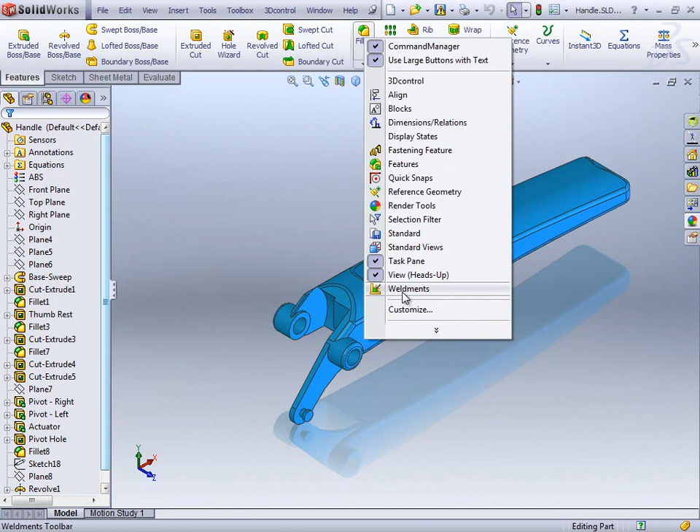So if you look, we've got our little part, and there's a little split tool that we have to use. If I right click on customize, you go into commands and features, you'll see our little split tool is there. So commands, features, split tool, and you can drag that up onto your toolbar for handiness. Do that in class as well. If you're watching this at home and you come into class, do it in class, because like I say, this is coming up in the test.

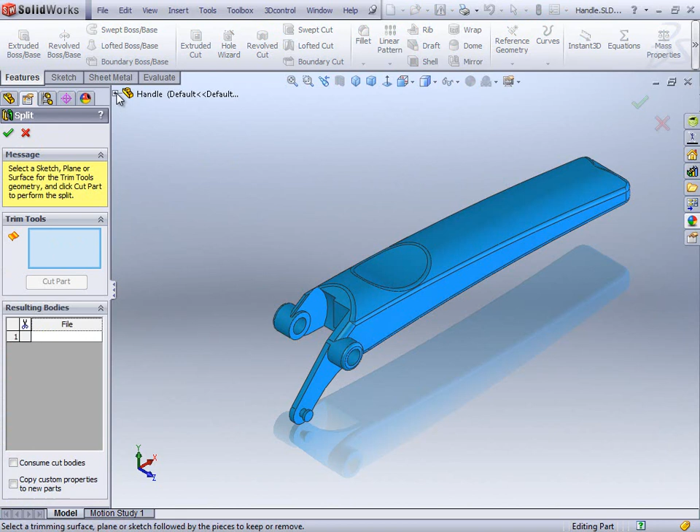So I click on that and select the split feature. You can see here we've got trim tools, trimming surfaces. So what this really means is where you want to slice this thing down. If we look here at our front plane, we're going to slice this one right down the middle there. Okay, so we'll have a look at slicing this down. And you can go ahead and actually cut the part now. So we'll cut it using that plane.

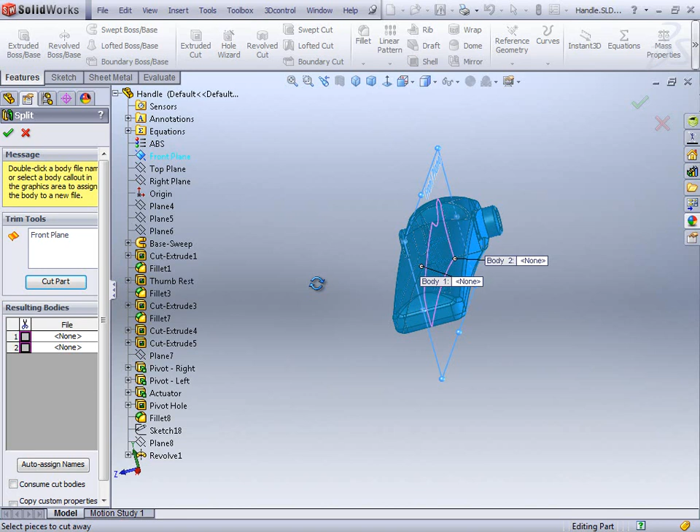And you can see down here the resultant bodies has changed to 2 because we've now got 2 solid bodies in this whole thing. Okay, when we click out of it, again we've got this label a little bit easier in this one to kind of see which one is which. So body 2 is obviously one on the right hand side and body 1's the left hand side.

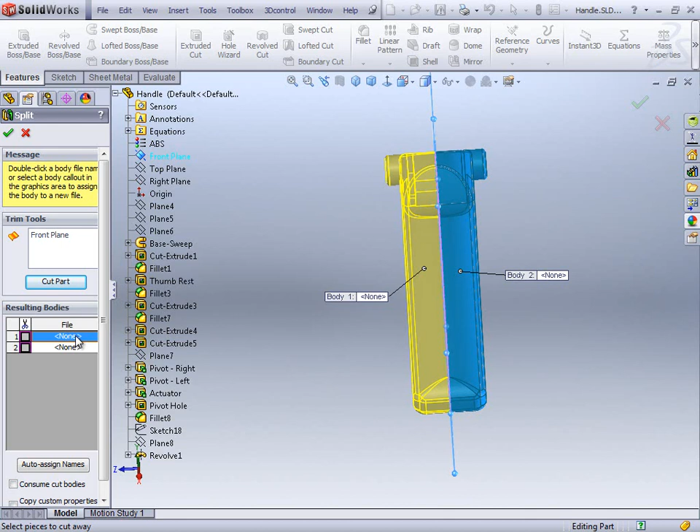So again, same as before, if I double click on that, click on a part, and in the desktop I'm going to save this one as this left hand, wasn't it? Hope we get the right side. Left hand, I'll call it the same as the book. So handle left side. I'll stick to the same name as the book. So click on save on that.

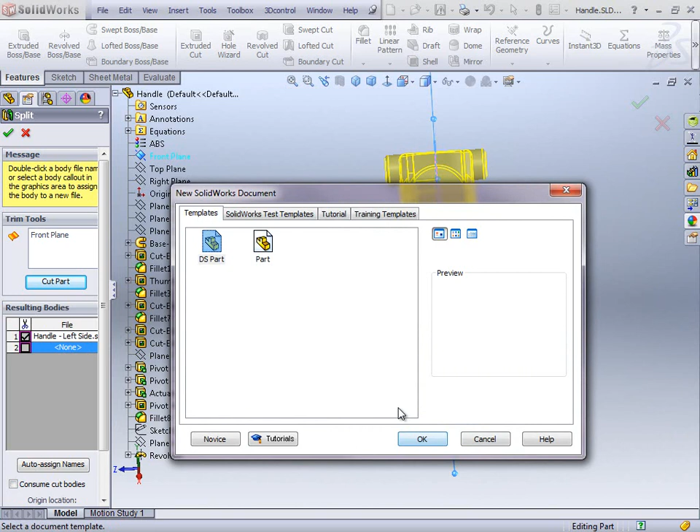And do the same now on this one. So this one, again, it's a part, and we're going to call this one handle right. Handle right side, and click save on that. So we've got the handle right side and handle left side. Okay, so I click OK to that.

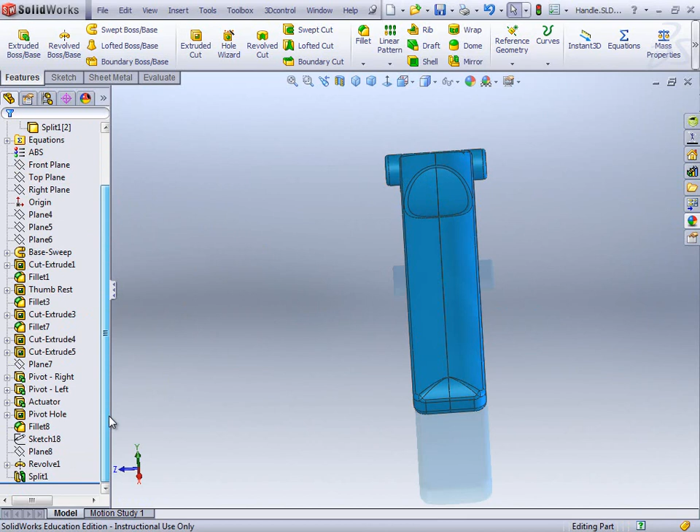It goes, it does its business, saving, it will convert the files to the current version because this is an old file, that's why I'm getting this, and we've got a newer version. So yeah, I'll go ahead and save that, and we'll go ahead and save the other one as well. Okay, so now we've got 2 solid bodies, because it's split down the middle and we've got 2 solid bodies as well. And you can see my little split tool.

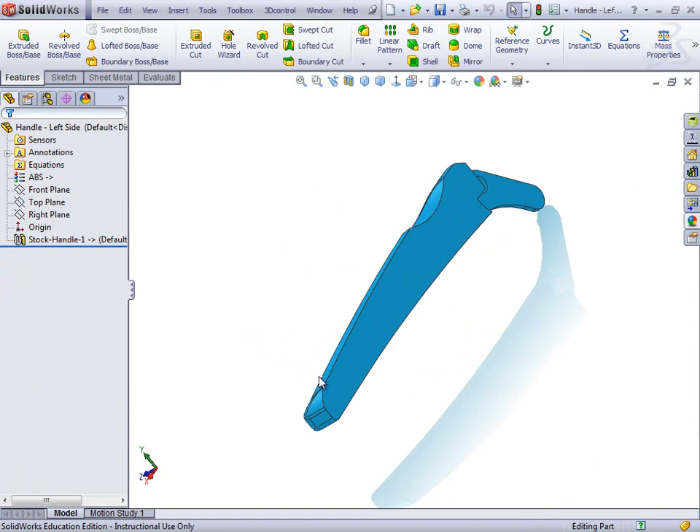Okay, and if I go out then I got a right hand part and left hand. Wrong way round, that's the right hand part. The other one was the left hand part. There we go. So we got both parts as separate files, and you could go and do whatever else work was needed in that. If I go back into my handle,

Just one thing to kind of finish off on that you're going to have to do in the test as well is just finish this one off and combine them back again. So although they're kind of separated, we're going to combine them back again, and just click on the add and select these 2 objects and click OK, and just combine them back to their original state, just to get rid of that split line and to get rid of the 2 solid bodies thing.

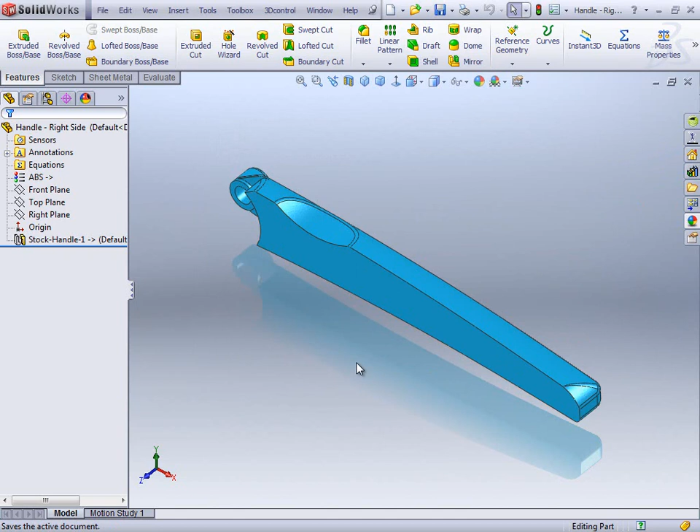You can see, update that and update that, and you see that one. I save all. That one's fine. Everything's kind of still the same there, and we're still kind of happy days with that. Okay, so we've got those kind of created.

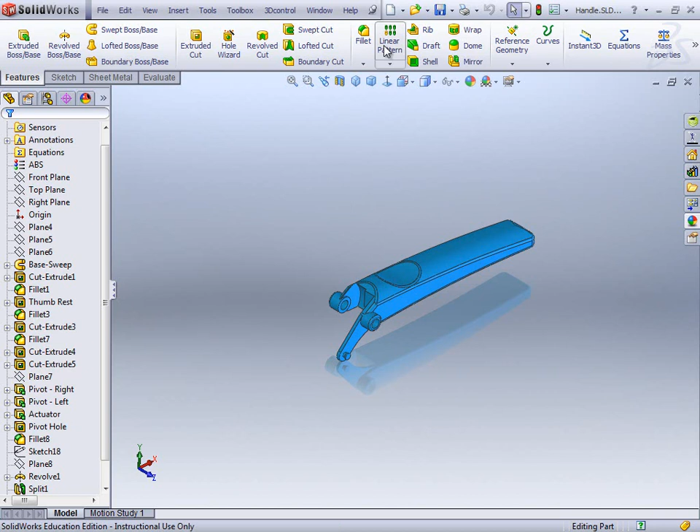Lastly then, the book just gets you to create a little assembly from that. So if I make an assembly from a part, so just do a standard assembly, and from the left and the right side, and if I do take my left hand first, say, and click on the OK, and then insert components, and then the right hand side, and then click on OK.

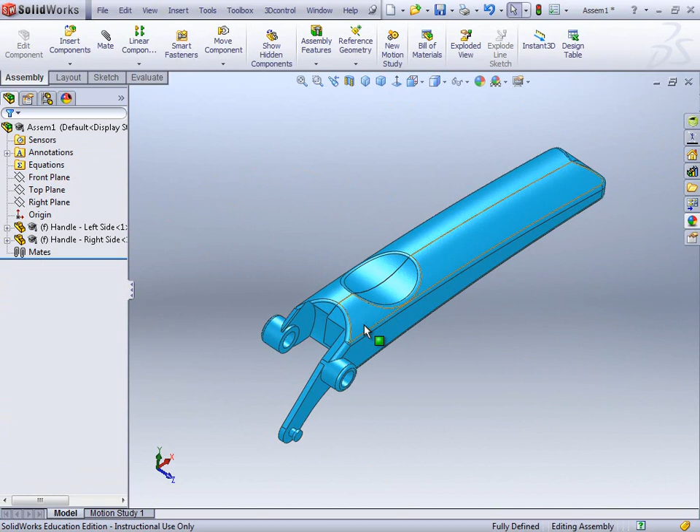You see both of them are fixed and it's fully defined, and we don't need to actually do any mates or anything like that. You see I can't move it because both of them are fixed, and because they came from the same original part, they're actually lined up perfectly. So I don't need to do any more mates on that. And you see I get my split line in the middle to show me there's two separate parts in my assembly.

Okay, just have a little practice of that. That's something you're going to have to do exactly what I've done there. You're going to have to do on the components you get to draw in the actual test. So just have plenty of practice on that. Okay.